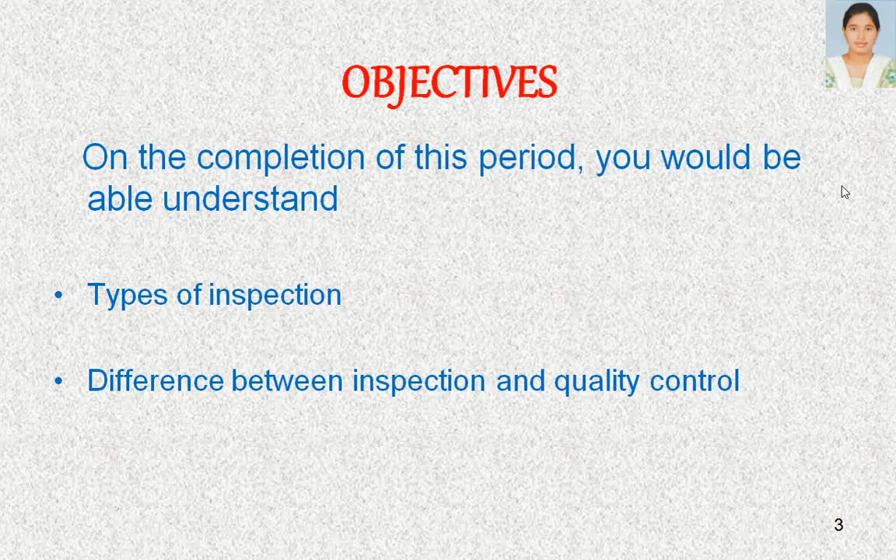In this lecture today we are going to learn some more types of inspection and the differences between inspection and quality control. Let us see what are the types of inspection.

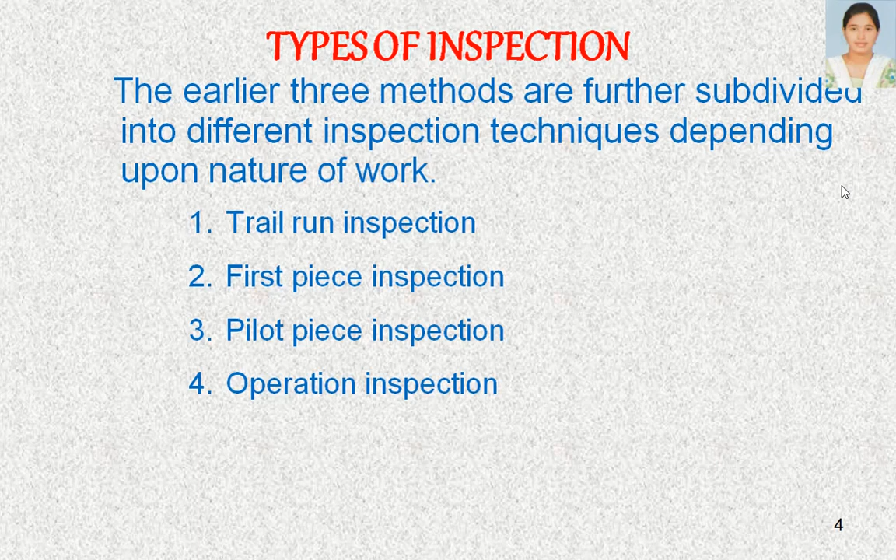The earlier three methods are further subdivided into different inspection techniques depending upon nature of work. So in the earlier method, we categorized inspection based on location. Now we are going to subdivide into different categories based on the type of work, like trial run inspection, first piece inspection, pilot piece inspection, operation inspection, sample inspection, final inspection, process inspection, 100% inspection, key operation inspection, functional inspection, stage inspection, and endurance inspection.

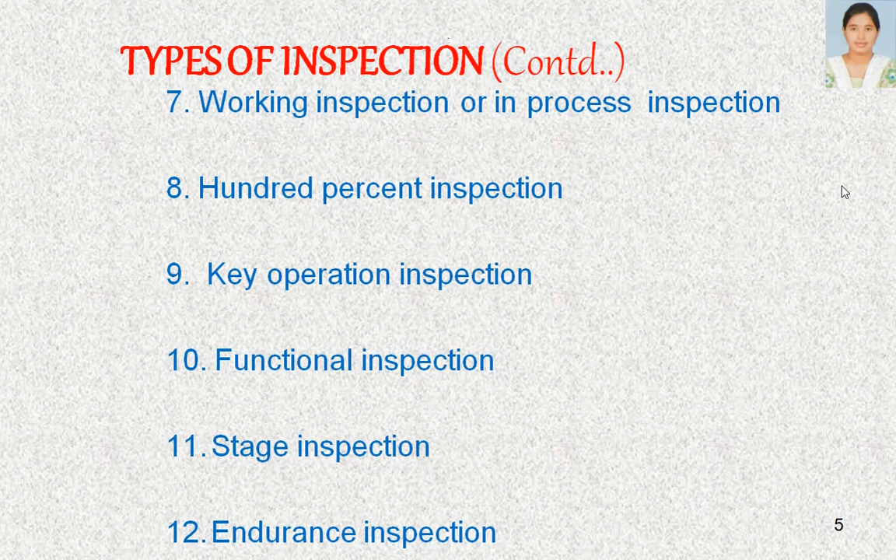We are going to differentiate inspection into different types based on where we are exactly using that work. Based on the nature of work, we are going to divide that inspection into different categories. Now let us learn various types of inspection based on nature of work.

The first one is first piece inspection. The name itself says first piece, so we check the first one or two pieces, and based on that we use that product. In case of automated machines, the first two or three pieces are inspected after the machine has been set. For example, let us take the case of a CNC machine.

I have written a program for 100 identical products. Before going for 100 identical products, we run the program for one or two pieces. Then we check or inspect those one or two pieces, and if they are found satisfactory according to prescribed standards, specifications, and drawings, then we can automate the program for the remaining number of pieces.

So in this inspection, we just check the first two or three pieces, and once found satisfactory, we automate the program and hand over the machine to the operator. If there is any defect found, we can change the program or take any remedial action for setting the machine, and take proper necessary action for getting a quality product.

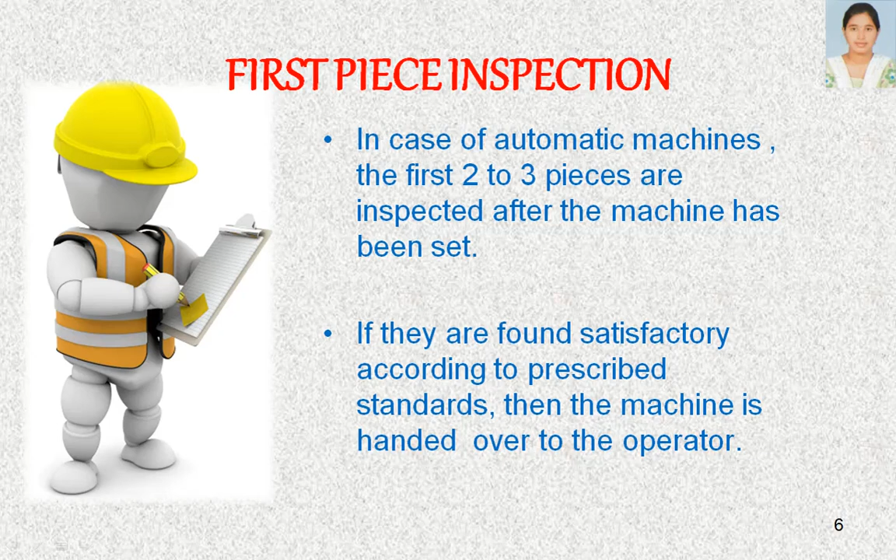Trial run inspection: the name itself says trial run, that's nothing but preliminary testing of how a new system or product works. Before sending it to the customer, when a new product is designed, it has to be trial run. This is done after the machinery is assembled. After assembly, it is tested for its performance to know whether it works satisfactorily under field conditions or not. So when we design a new product or component, it has to be tested before supplied for real-time conditions.

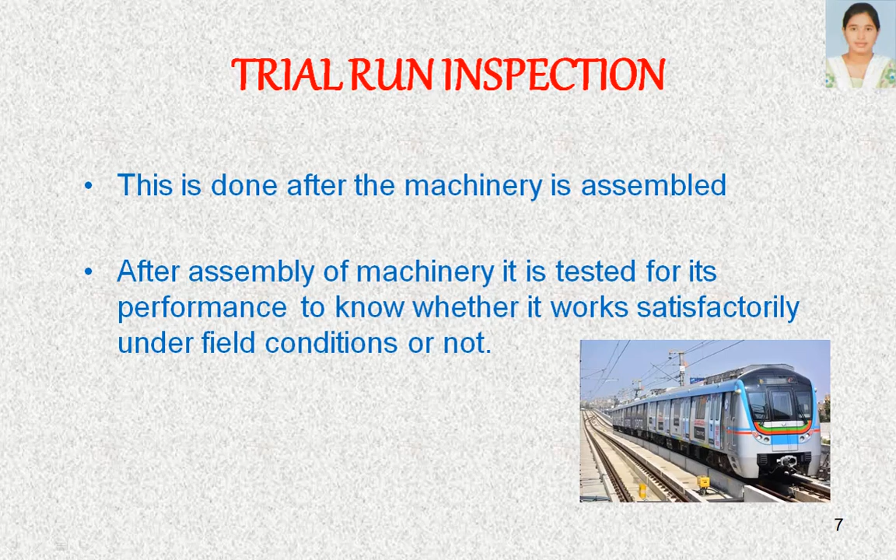For example, metro rail. After designing the metro rail and construction of its pillars etc., it has been tested for many test conditions, field conditions, weather conditions, etc. After the trial run is successful, it is opened for the public. This is how trial run inspection is done for various products.

The next one is pilot piece inspection. This is used in product layout. A pilot piece is taken and all operations are carried out for a newly designed product. This is done for each machine and is tested for its accuracy.

Similarly to trial run inspection, here also a pilot piece, that's nothing but a new product, the first product, is taken and checked for all operations. Generally this is used in the aviation or aerospace sector. They produce one or two pieces of aeroplanes or samples, and based on that they check all conditions, field conditions, and operations, and once satisfactory, they manufacture the required number of components.

Generally this is done immediately after a new design of product is developed. The product is manufactured in a pilot plant if it would disturb normal production in the production shop. Generally we can call it a prototype. Before producing the actual product, we produce one prototype model and test it for different test conditions.

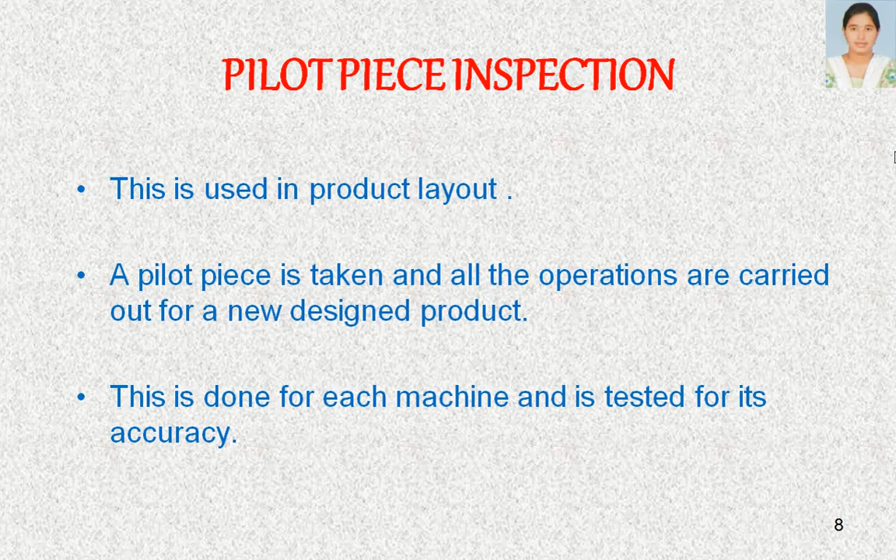If it is working satisfactorily, then we can go for actual production. The next is operation inspection.

In this, the inspection is carried out immediately after the completion of operation and before going to the next operation. It is carried out when more than one process is required to produce the product, so inspection is done after every stage, checking the dimensions of the product.

Let us take turning and drilling operations. After turning, we are going to check the product, and after drilling, we are going to check the product. After the next operation, we check it again. This is how after each and every operation's completion, we inspect the product and send it for the next operation.

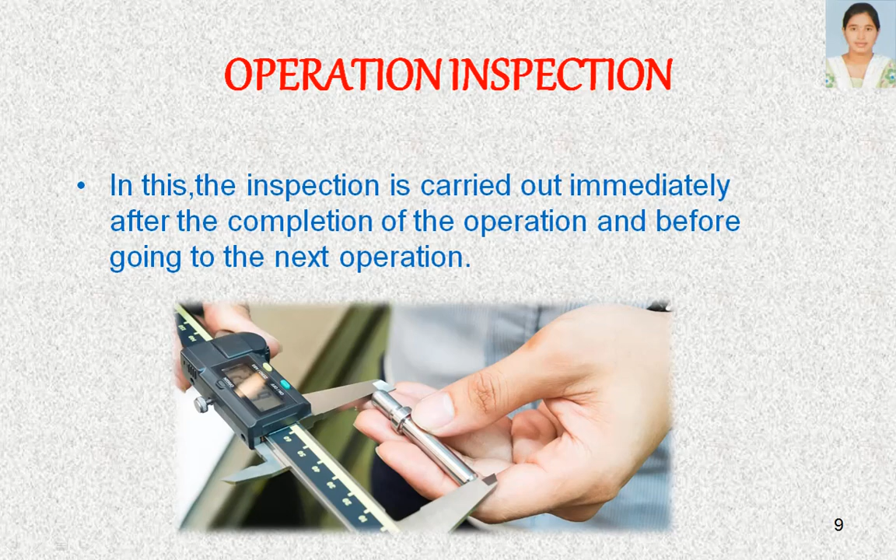Generally, this operation inspection is done with small calipers or gauges where it can be checked near the workplace itself for dimensions. The next one is sample inspection.

In this inspection, a certain sample from a lot is taken at random and is inspected. Generally in mass production, when we are not able to check each and every product, we collect a sample from the total lot at random, and these pieces are then inspected. If the sample is in the acceptable range, the lot is accepted. If the sample has many defects and is in the rejectable range, the lot is rejected. So it is generally based on acceptance theory, that's nothing but probability theory.

In this inspection, a certain percentage sample from a lot is taken at random and inspected. This type is used where it is not possible to inspect the whole lot, or where destructive tests like breaking strength, combustibility of materials, hardness, etc. are to be carried out. So generally sample inspection is done where we have to check the properties of a material by destructive methods. In such cases, samples are taken and tested.

Acceptance of the lot is based on statistical quality control method. So generally this sampling inspection comes under SQC, statistical quality control. Sampling inspection is based on theory of probability. If the defects in the samples are within the permissible limits, then the whole lot is accepted with desired accuracy.

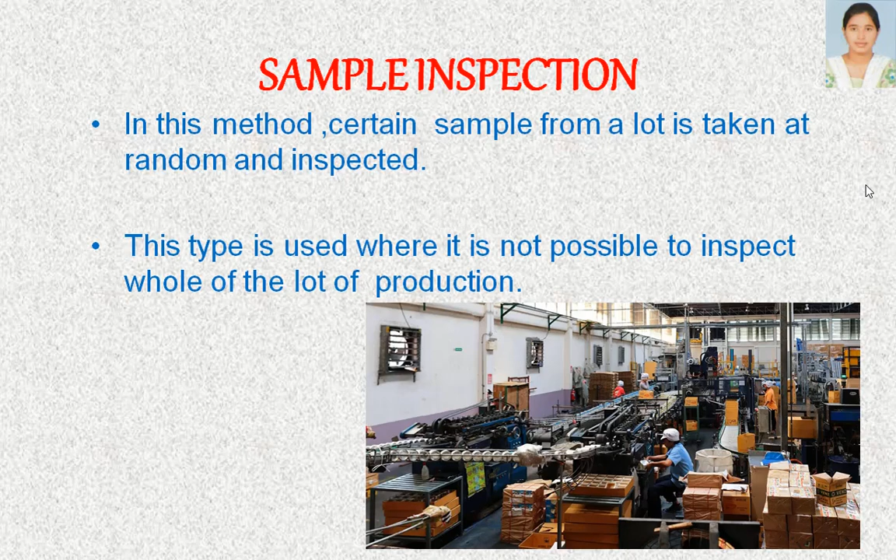Let us see about final inspection or working inspection. In this, the articles or products are inspected while they are in process for their specifications. Periodic inspection is done to check that the products made are within specified tolerances. There is a periodic check, like every 10 or every 100 products completed, based on the requirement, we check the machine parts or tool life, etc., to see whether they are within specified tolerance or not.

During working, the machines may go out of adjustment and tools may wear due to continuous working. Sometimes bolts and nuts, due to vibration of the machines, may loosen, and these vibrations affect dimensional tolerances. As tools wear after continuous production, the surface roughness and accuracy of the workpiece may be damaged. So we check them periodically.

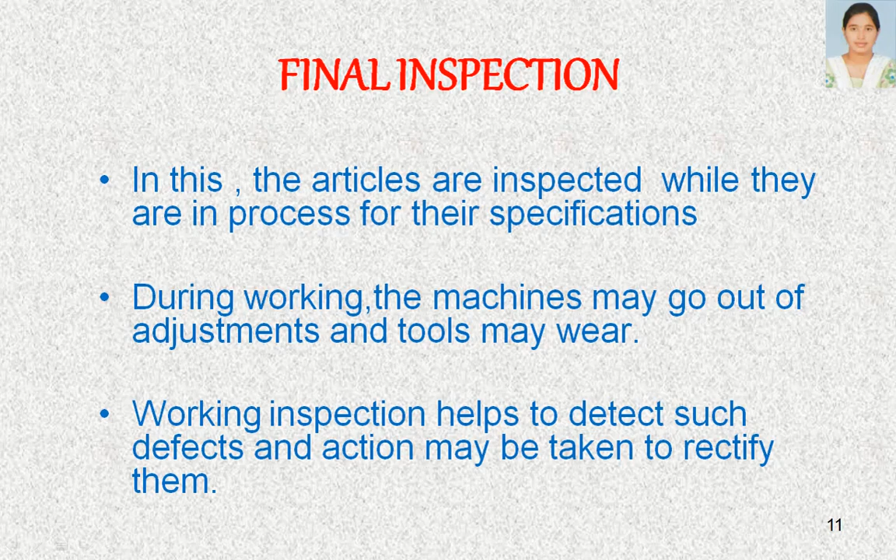Working inspection helps to detect such defects and action may be taken to rectify them. 100% inspection is the full inspection of each and every product. So whatever product we produce, if we inspect all of it, we call it 100% inspection. This is exactly opposite to sample inspection.

Generally, this 100% inspection is essential for safety equipment, electrical appliances, sensitive instruments, and products under strict guarantee. This method is costly and takes more time, and it is not suitable for products produced on mass production. So generally this method is only used for safety equipment, electrical appliances, and sensitive instruments like pressure gauges, pressure cookers, etc., where we need to test before giving them to customers.

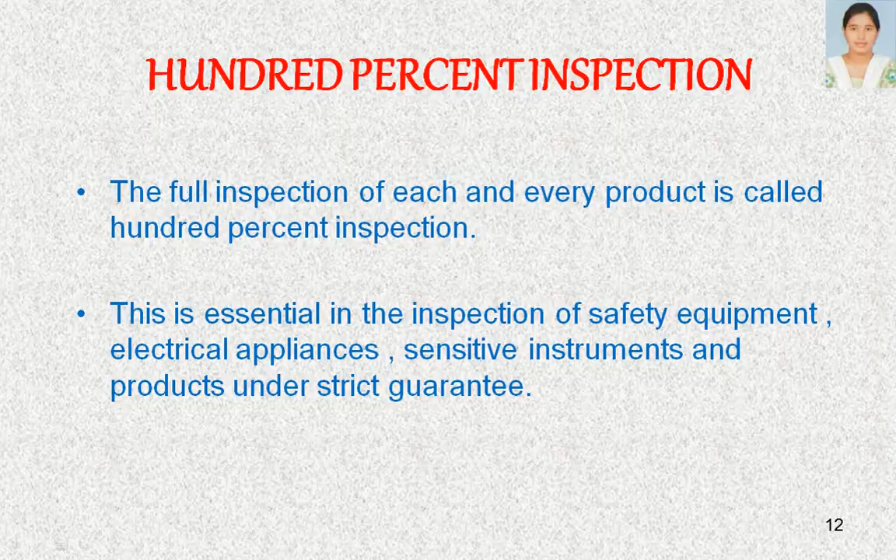Let us see a small video regarding inspection.

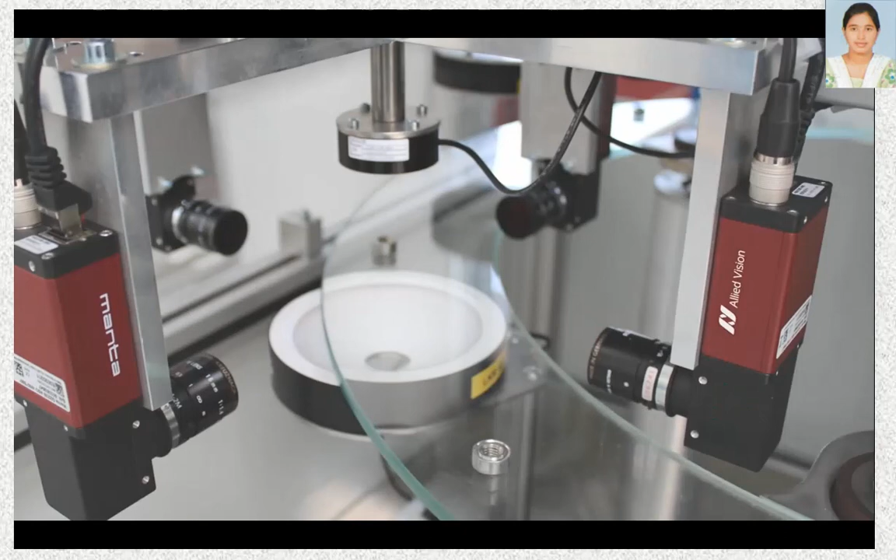Next is key operation inspection. Every product has key points in its manufacturing process. Some processes are important and more prone to mistakes or faults, so the product is checked before and after the process. A key point is a stage where the product requires expensive operation or rework is not possible. Inspection at this key point helps avoid unnecessary further expenditure on poor and substandard parts which are likely to be rejected finally.

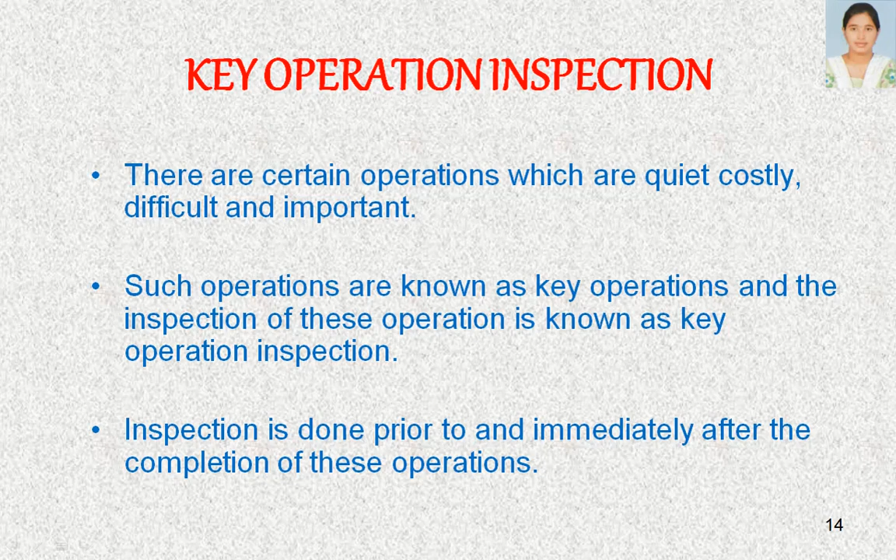So there are certain operations which are quite costly, difficult and important. Such operations are called key operations. In this kind of operation, we check before and after the process. So the inspection of this operation is known as key operation inspection, done prior to and immediately after completion, so as to reduce wastage and cost. Since these operations are costly and difficult, we concentrate on them and check before and after the process completes.

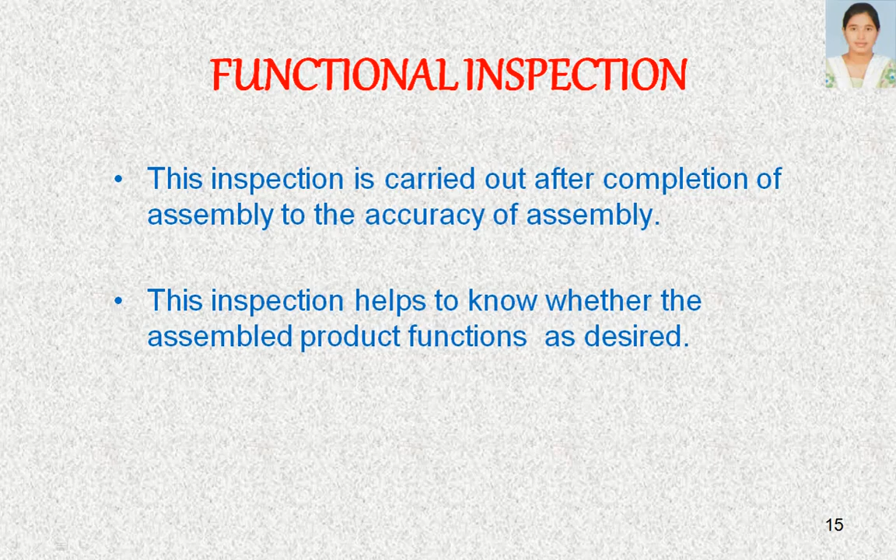Functional inspection is carried out after completion of assembly to check the accuracy of assembly. This inspection helps to know whether the assembled product functions as desired. Just after the assembly has been done, we check whether it has been done properly or not.

Next is stage inspection. In this method, inspection is done between two stages of production. So if the inspection is done in between stages, we call it stage inspection.

Let us see one more video regarding inspection. Here he is checking the dimensions of each part after the product has been made.

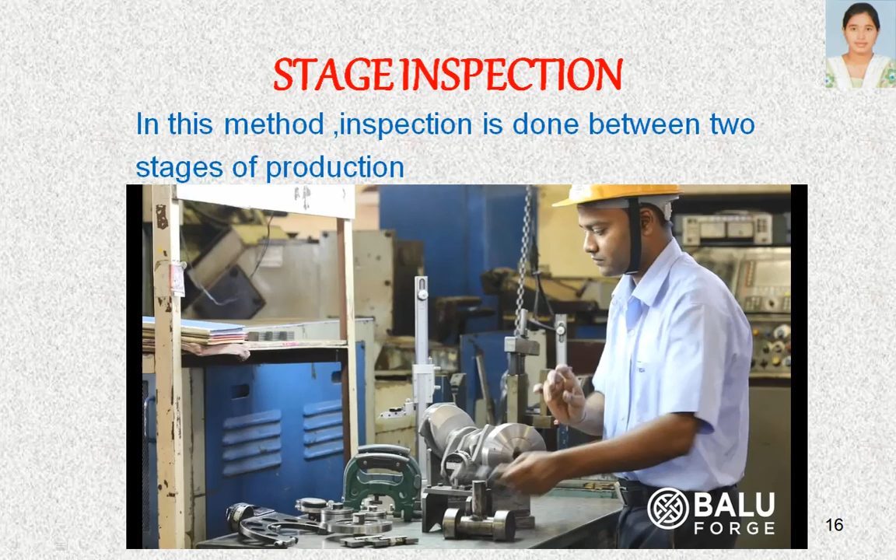Endurance inspection is carried out to know the life of a product. It determines how much time an assembly withstands use and how to detect defects, if any, for corrections. By using this test, we know how long the product is going to work, and based on this we see warranties on products like a 5-year warranty or 2-year warranty, giving assurance that it will work properly for that stipulated time period.

This is how they know how much time the product is going to work. So endurance testing tells us about the life of the product. If we follow the specifications given by the manufacturer, the product will work accurately for that many days. This is what endurance inspection assures us.

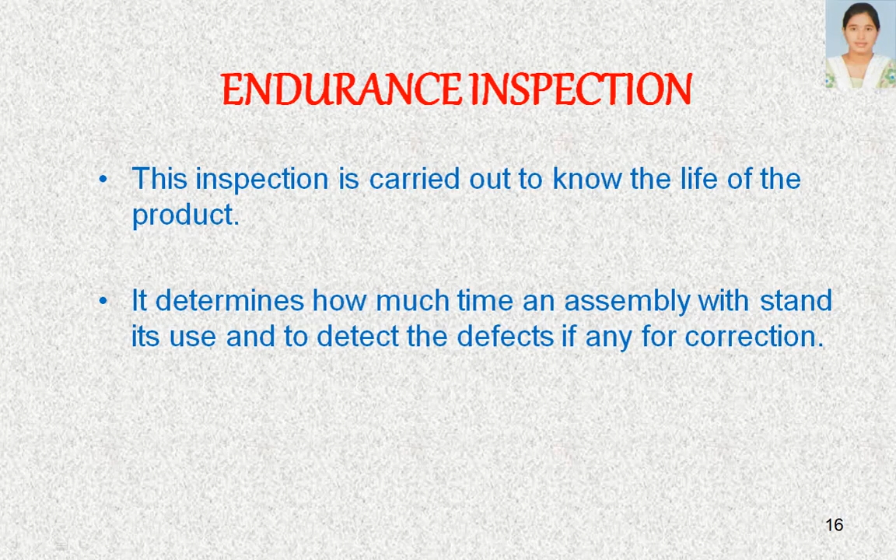These are some of the types of inspection we learnt based on nature of work. Now let us see the differences between inspection and quality control. Inspection is the art of checking and sorting out defective items. By doing inspection, we check the product, sort out defective items, and accept the proper ones.

But quality control aims at prevention of defects at every source. Inspection is done after the product has been manufactured, while quality control acts before the product is manufactured, preventing defects at every source.

In inspection, there is no feedback system since this is done after the product is completed. But quality control depends upon an effective feedback system and corrective action procedure, taking feedback at every source and every operation.

Inspection discovers products of bad quality produced, maybe due to wrong tools or improper setting, after the production is over. Quality control, however, prevents the issue of wrong tools or improper setting before commencing the work, done prior to the production line. Hence quality control prevents defects before they are made.

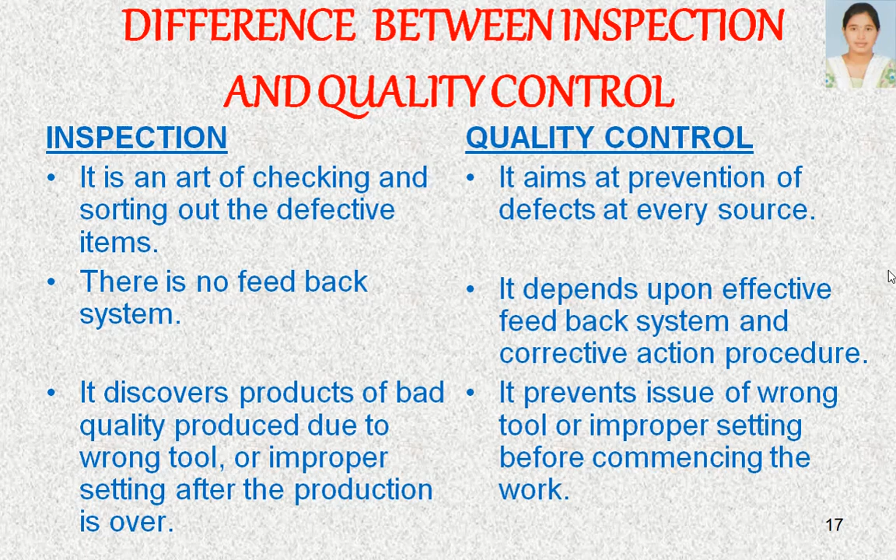In inspection, the operator receives information about his poor performance at the end of shifts, knowing his defects only after the product has been examined. But quality control provides correct instructions to the operator before starting work—how to do it, the standard method, and how to avoid defects—everything is informed to the operator by the quality control team.

Inspection is a tool for controlling the quality of product. Quality control is a tool for making things right rather than discovering and rejecting those made wrong. So before doing the work itself, we make things properly so there is no rejection after the product has been made.

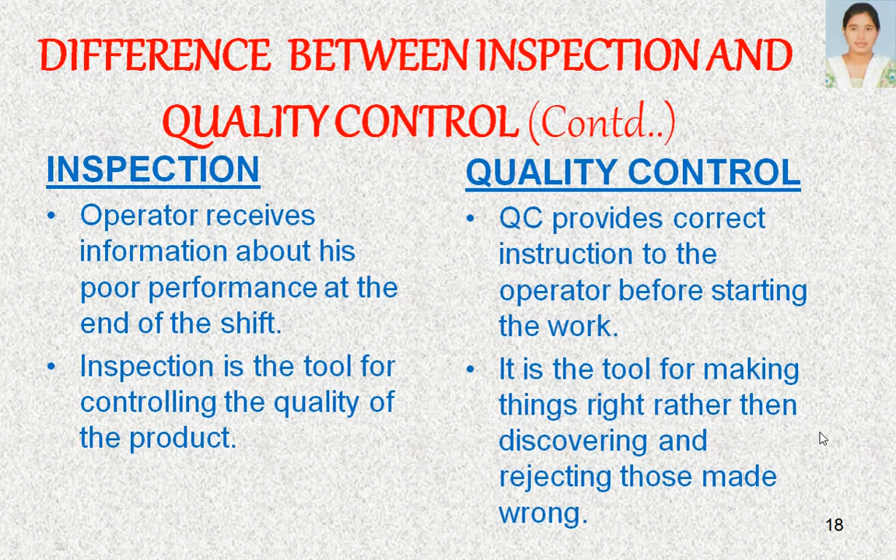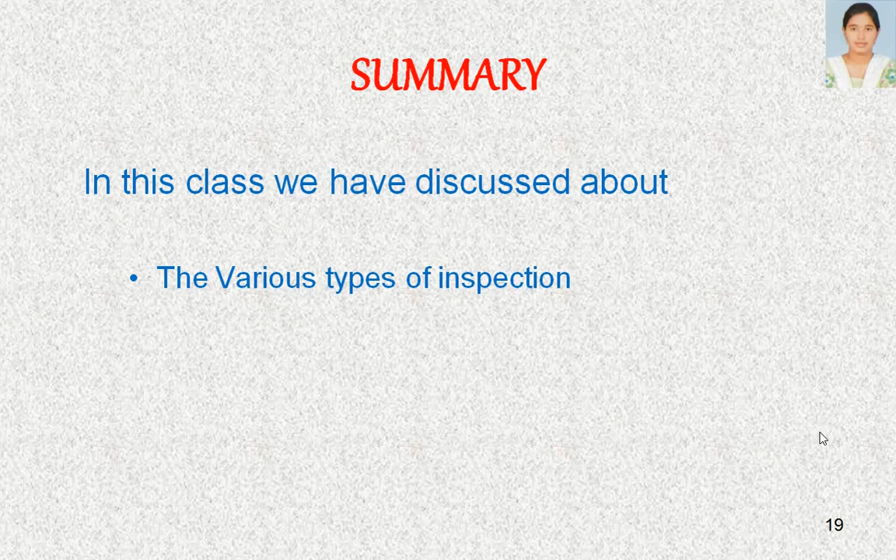These are some of the differences between inspection and quality control. Let us summarize today's class. We discussed various types of inspections like 100% inspection, sampling inspection, key operation inspection, endurance inspection, working inspection, operation inspection, functional inspection, pilot piece inspection, and first piece inspection, based on nature of work. We also learned about the differences between inspection and quality control. Thank you.